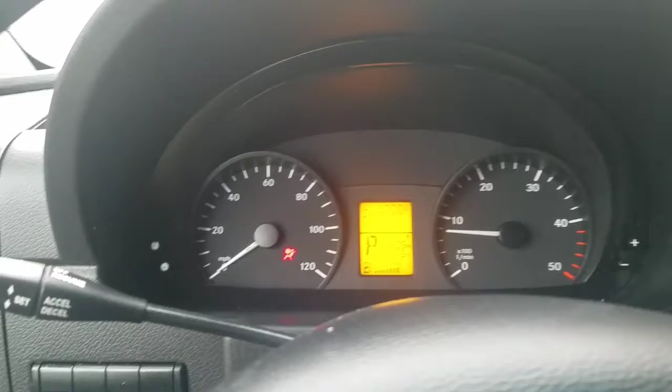Okay, we're working on the Sprinter. We're taking a look at the 2-hour inspection. Right now we're inside the car. Going to start it. First thing I notice is that it says the service is overdue by 1,700 miles.

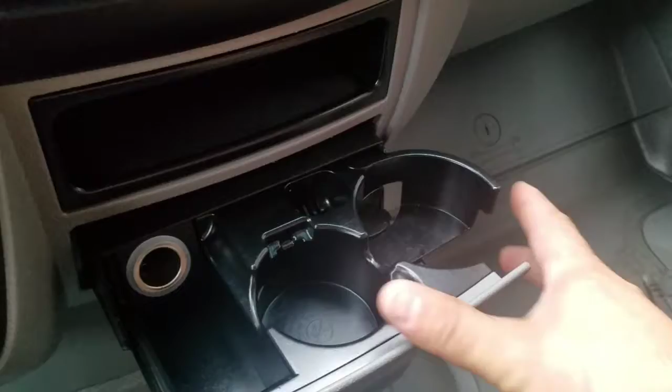There's a small cover missing for an extra button. It's just a cover, but it is missing. What else did we notice? There's a clip, the clipboard, supposed to hold papers. We put the clip here. That's broken. The cup holder is supposed to ratchet in and out to hold your cup. So if we decide to put our water here, it should tighten up and hold, but it doesn't. It'll just fall over. Alright, so I guess you could put it there.

Test the glove box. Glove box opens, closes, locks. Parking brake. Put it in drive. Parking brake is holding. In reverse, holds. Okay, we have another compartment here. That seems to be working. Dome light works. Both seat belts we tested, they're both functioning. They lock.

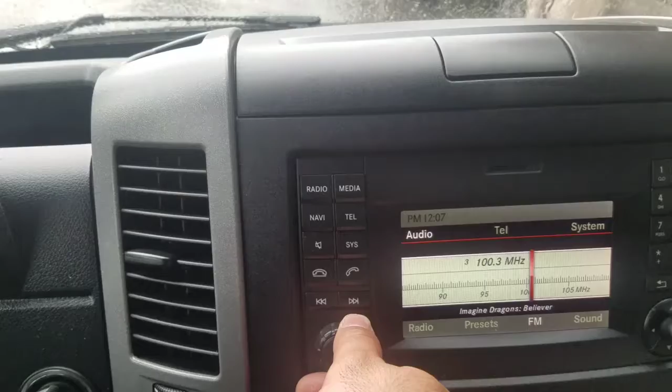Interior looks pretty clean. Yeah, pretty normal wear and tear. It has 31,000 miles, very low miles. Alright, the interior does look pretty clean. Radio is functioning. It doesn't sound like any of the speakers are broken or damaged.

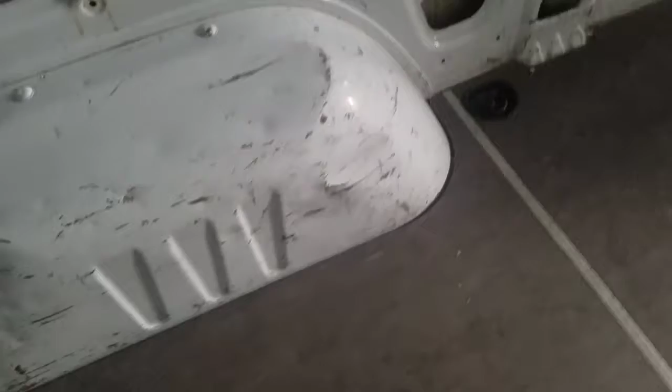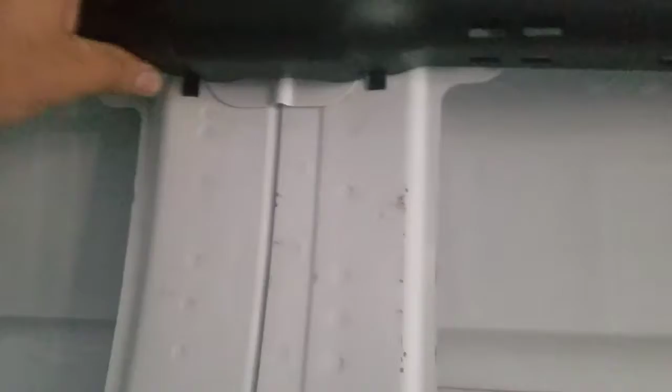We'll take a look in the back here. Floor looks pretty decent. The wheel wells are banged up a little bit on the left side. Some internal damage from it being used as a cargo van. Overall, it looks pretty good. There's a few missing covers for the electrical system, but not a big deal. Everything else seems to be connected over here.

Wiring's working fine there. Alright, I got a dome light that's... okay, so there's a little bit of an electrical problem here because I wiggle this and the light comes on and off. I guess the wire shorted somewhere. It came apart on the actual dome light itself. A little bit of damage on the internal panel for the door. I'm not sure if any of the damage protrudes the body to the outside. I'd have to look from the outside when we get back out.

We're gonna go on a quick road test and see how everything feels. Okay, we tested the AC. It is blowing pretty cold. Fan speeds are working. Recirculate, it's working.

Alright, so we're going on the road test. So far it feels pretty good. The wipers are wiping, no problem. There was a little bit of streaking in the beginning, but it seems okay now. The truck's a little bumpy, but it's probably because it's empty and it has the 2500 suspension in it, so with an empty van you're going to feel a little bit more bouncy.

I hear the turbo coming on. It sounds like that's working fine. It has power. You hear a little bit of noise in the rear of the car, but it sounds like it might be normal. It's probably because the van's empty and it's echoing.

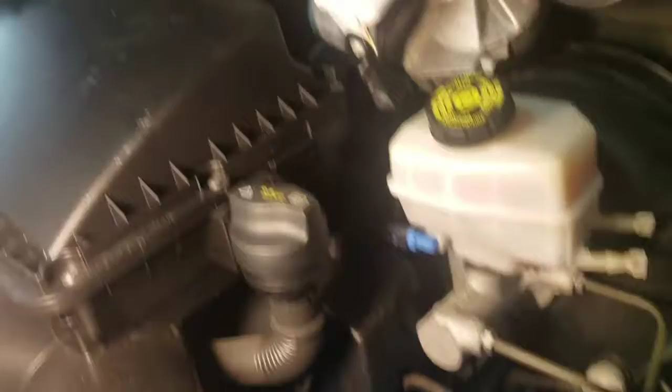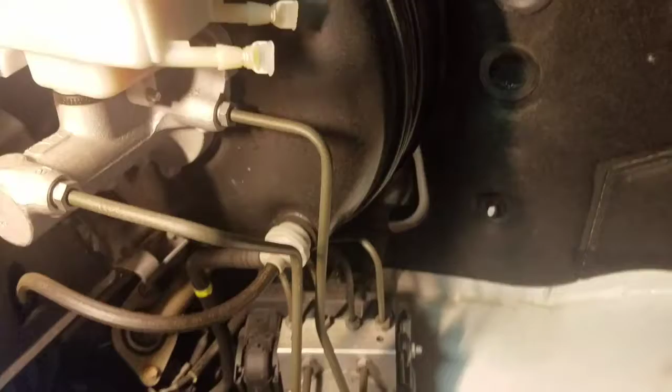So we have the hood open. It has the 4-cylinder in here. I do not see any signs of leaks. Washer tank is holding. Brake lines are okay. There's no indication of a front end crash on the support, at least here. Looks like it's pretty solid.

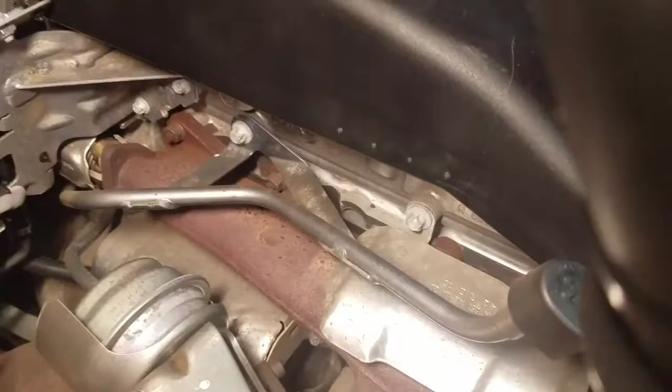Okay, this is the other side of the engine. The turbo looks okay. Everything looks very clean, which I would expect for a 30,000 mile car. Looks original, looks OEM. Diesel exhaust fluid.

The coolant kind of looks green, which usually means it's been replaced. Actually, no, when I look into it, it looks more blue, which is the OEM fluid. So that looks okay.

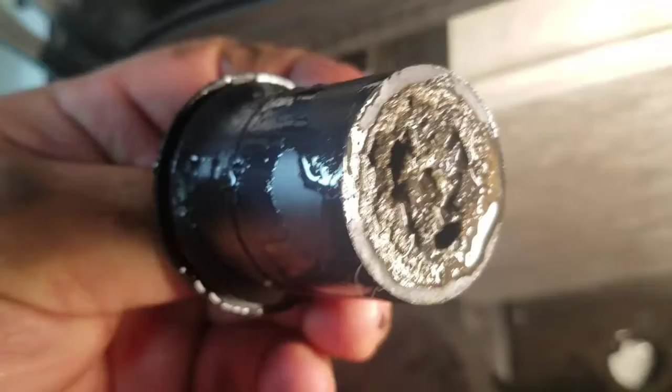I do notice that the reed valve, which is just a drain valve in the air filter housing, is clogged at the bottom. So what I'll do is try to clear the hole. It's better just to remove this completely. Alright, so I removed this valve. This valve gets clogged. I cleared it out. We'll clean it really fast to prevent water from going in here later, because rainwater can come in.

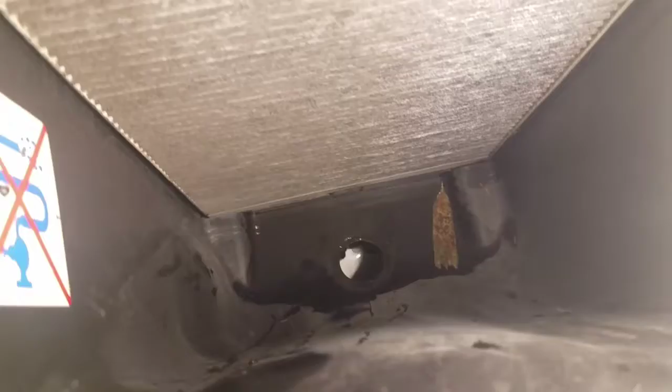It goes through this filter. I don't know if it's happened already, and then it can go into the glove box area and into the car. So here, Jose, just grab this, we're gonna clean that out in the sink. That's just a preventative thing, so whether you buy the car or not, at least the next person won't have that problem.

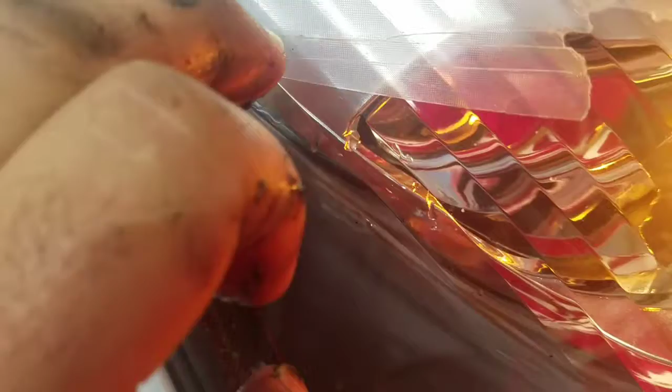Okay, the lights are all working. I do notice that there's some tape around the corner here of the light. I can't really make out whether it's cracked or not, but it does look like there might be a crack. It's very hard to tell because they have the tape over it. Yeah, I can't really tell. It feels like the tape is definitely cracking.

I think it might be covering something. I don't see why else they'd have tape over it, unless it was cracking or there was a crack in the lens. It's hard to tell without peeling that off, but the headlight may be cracked on that side. The grille looks good, looks brand new. There's again some tape on this side. You might want to ask them to peel that off before you buy it, and take some pictures to prove that it's not cracked on both sides.

It might just be some tape someone put there to protect it, but it's hard to tell whether it's cracked or not. The body looks like it's in really good shape. There's a couple little dimples over here, that's gonna happen from the inside. I could see a few more on the side here. You can see the reflection of it right there, it changes, and there's like a few dimples. That's gonna happen in a cargo van. There's another one down here, it's raised because people put things on the inside.

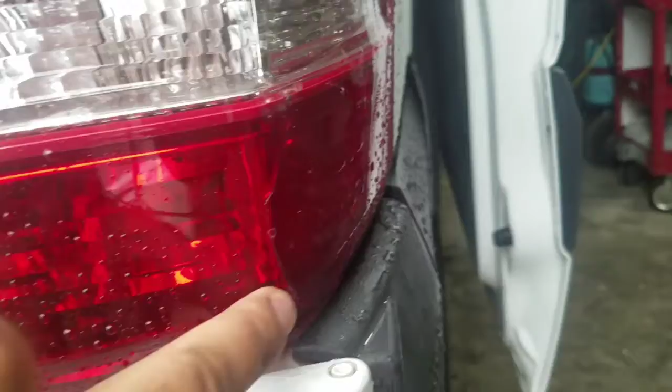Taillight has a crack right here, small crack. Water's probably going to start entering. There's another crack down here, and one more - oh, that one's actually not going through, but you do have one at the bottom here and one over here on the side. Water gets in here and it'll start corroding. It happened to our van.

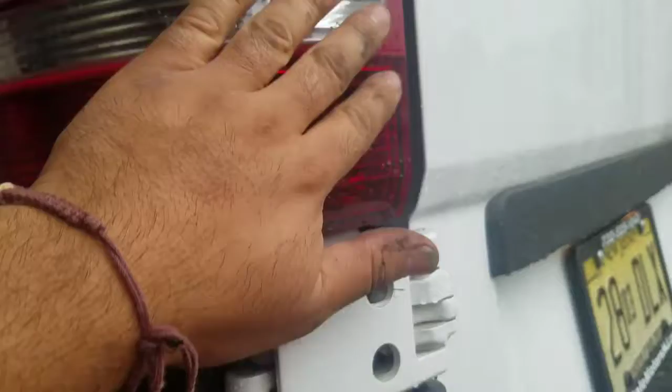This side, just a little scuff, but nothing cracked. On this side, doesn't feel like it. No, this side looks pretty good. Your marker lenses are okay. Marker lens okay over here. It's hard to tell, but the third brake light looks alright as well.

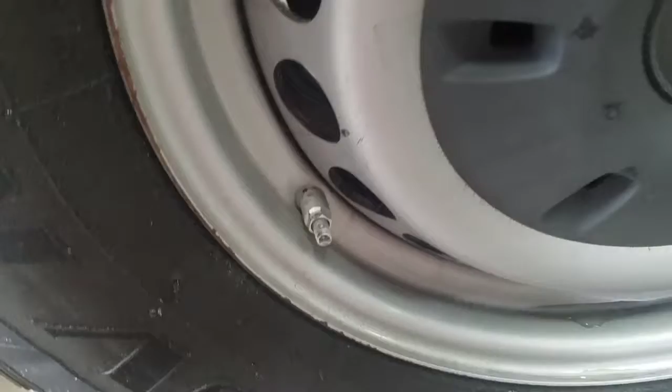Tires have ample tread. This is the left rear tire. Right rear tire is just the same. Right front tire, plenty of meat. Left rear tire, right rear tire the same. It has valve stems, metal, which probably means it has a tire pressure monitor system in it.

The sliding door opens very smooth, like glass. It's floating. We have some problems with our door on our van, so I noticed that that's in great shape there.

Doesn't really look like too many things were spilled on the interior. A couple of stains expected. And we're running the diagnostic test now, which is why the wire is connected to it.

And see, the door's opening. Door opens, no problem. Interior looks pretty good. Everything looks good under there.

Let's see if it has the toolkit. Can you grab a flat screwdriver? We'll open up the toolkit.

Window switches work, windows are going up and down. Alright, so the toolkit's in it. Yeah, toolkit's in there, lug wrench, bottle jack, all your parts are there.

Overall, as I said before, the van's in really good shape. A couple of things like the tail lights, headlights are questionable. I'm going to check the brakes and the undercarriage while one of the other guys is connecting the computer and checking to see what kind of codes we have.

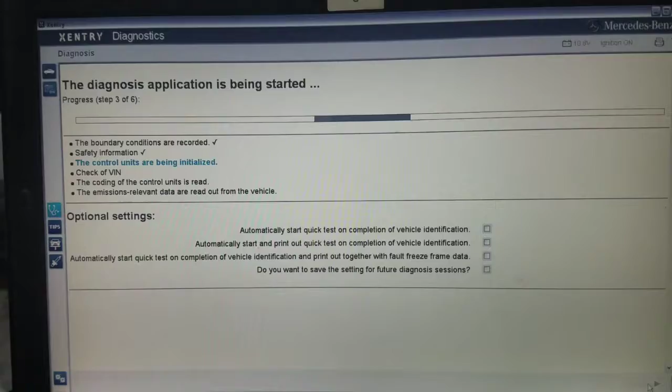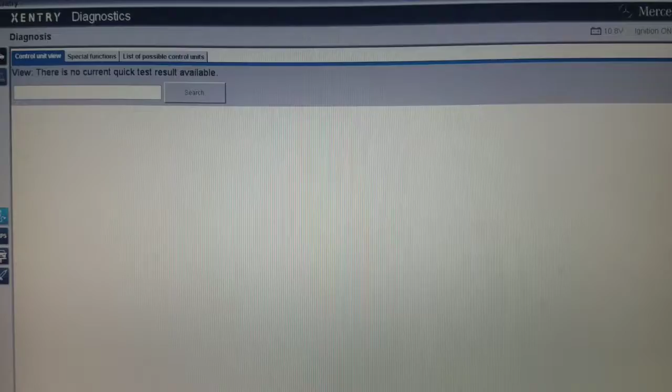Okay, now we're running the computer diagnostic portion of the test and the inspection, and the computer's going to do its thing. It's going to connect to all the control modules in the car, and it's going to tell us if there's any old codes, new codes, current codes, and once we have all that data, we'll show you all the information. So we're pretty much going to do a quick test.

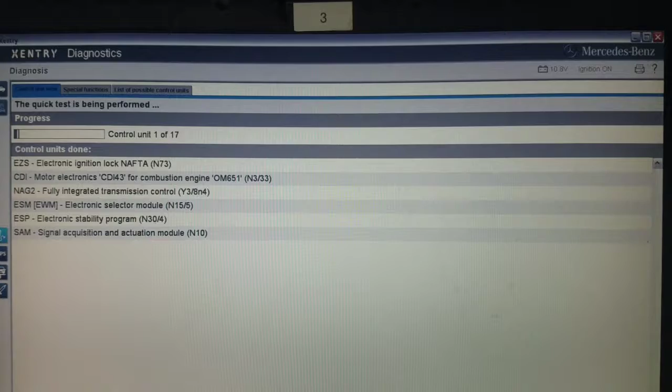And run the tests - steering lock system, engine module, transmission module. Still running the test.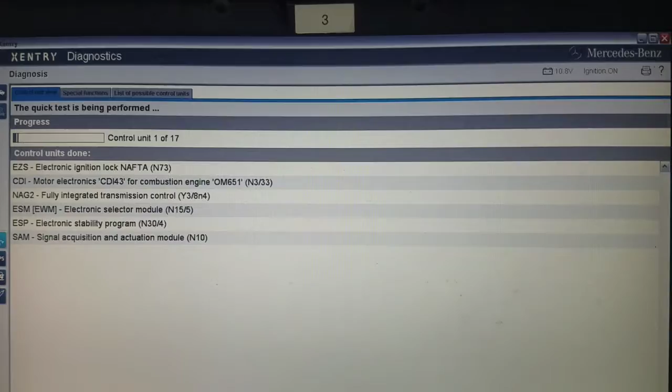Okay, so this is the rearward view. This is the transmission and drive shaft. Everything looks good. This is your diesel particulate filter and flex pipe coming down on the 651 engine, which is the 4-cylinder.

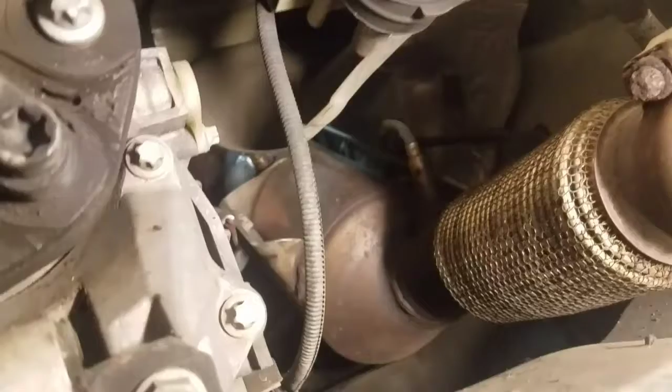Normally, whenever this happens, it usually will crack on a 642 on the flex pipe here, but this one I'm not sure if it's going to do the same thing, but it is not cracked. There are no problems with the diesel particulate filter or flex pipe at this time.

I also looked at the front of the engine area, underpan, the underpanel for the oil pan. Everything is dry, I do not see any leaks. There isn't any sign of oil. Transmission looks good, again no leaks. Mount feels solid - well, not solid, it feels like it has the right necessary play.

I thought there was a little bit of a fuel leak. Smelled a little fuel when I slid under, but I think what that is just some overspill going down the filler neck and dripping out the side. So it's a false alarm.

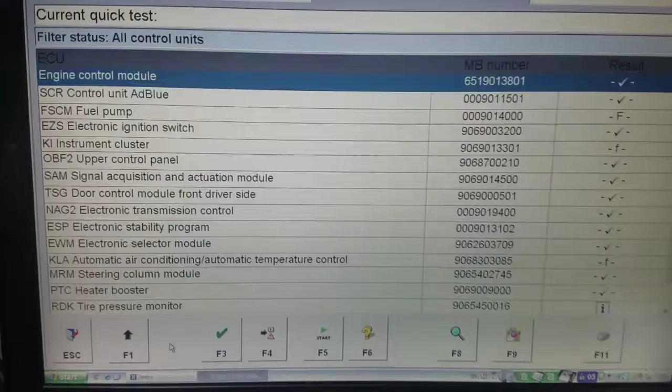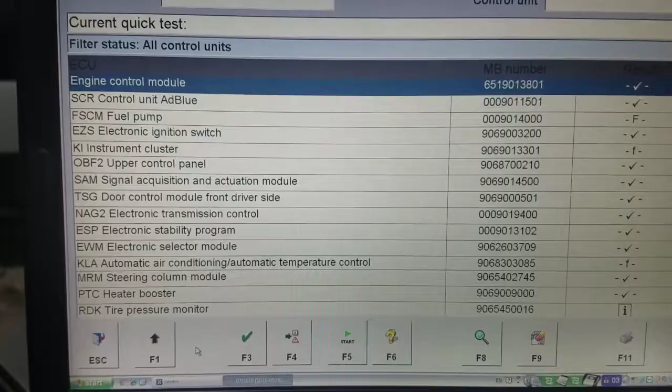Okay, for some strange reason I had an internal, odd fault - it said unknown fault type in the engine control module. And whenever I click on the engine control module to enter it, it gives us a glitch, and it tells us that there's an error, it cannot communicate. No matter what I do, it tells me to check these things. So it is possible it could be an engine control unit, it could be a power supply, or engine CAN bus problem - CAN bus is usually the network, communication data lines.

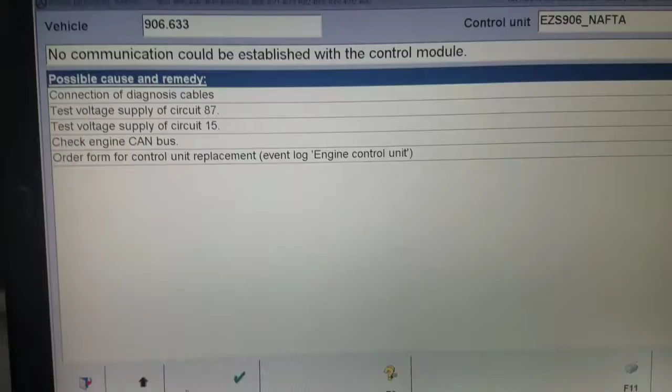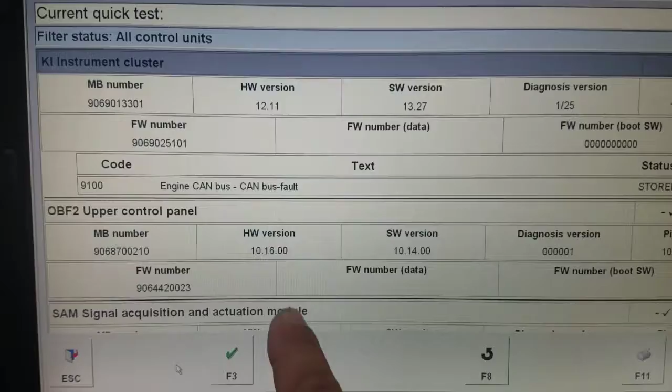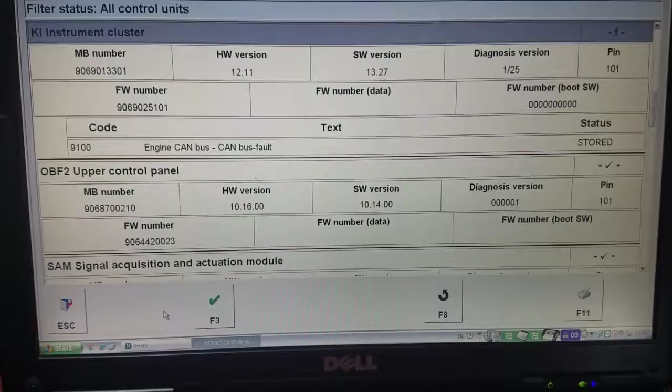So that's possible because we did see another code in the instrument cluster, saying that the engine bus has a CAN bus fault. So it's possible there could be a CAN problem with the car. It is driving fine, there isn't a check engine light, there isn't any issues with that. There may be nothing, but I have to at least disclose that I'm having an issue getting into the module. It could also be a glitch in our software, but unfortunately there's no other way to check that.

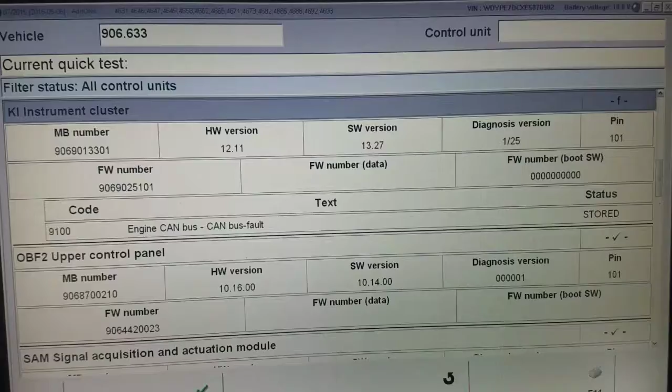If you decide to purchase it, I would definitely put a clause in there telling them that you might have to go to the dealer to have them check just to see if the engine module is okay with another software version, something newer. And if it doesn't come up as a problem, then you're good.

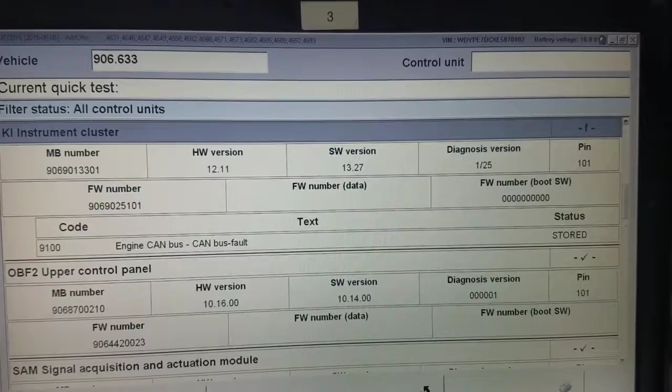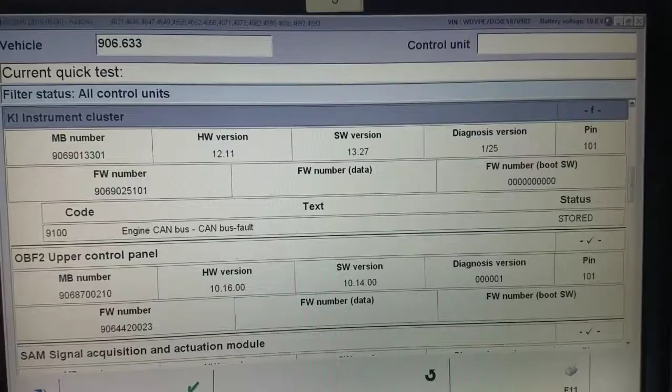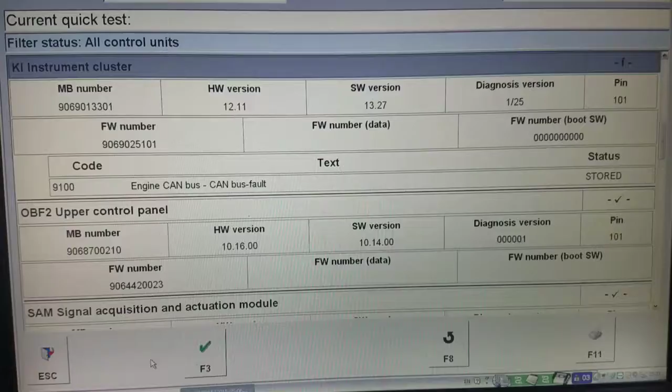If it does come up as a problem, then it'd have to be fixed. It's odd because the unknown fault type is a general code, and it will let me erase the code because it was stored, but for some reason I cannot get in. I was able to get in under the wrong engine, but it tells me there's a problem. In other words, I'm in the wrong control module, so it should be automatically picking this information up. It's noteworthy prior to purchase at minimum.

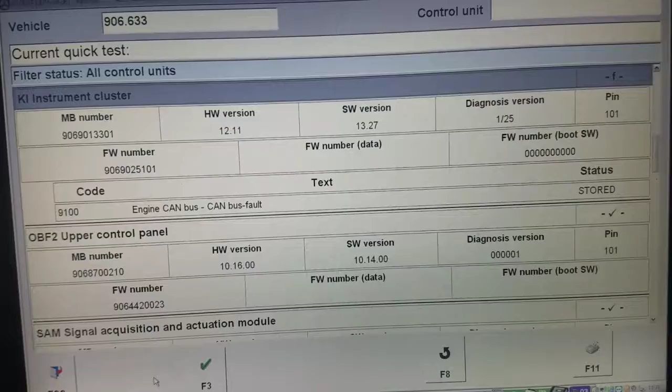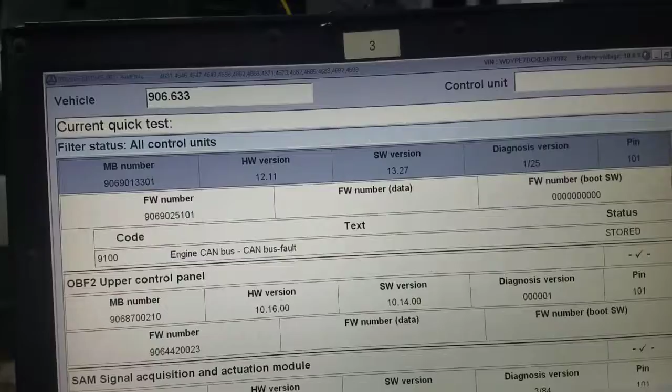So this concludes the electrical inspection of the vehicle. We did mention that there was a fuel code. Fuel pressure circuit is low.

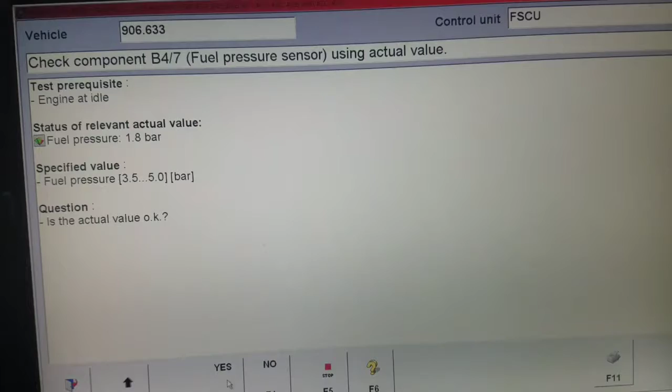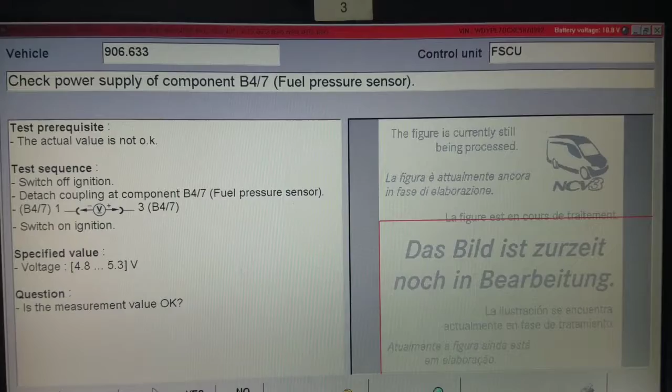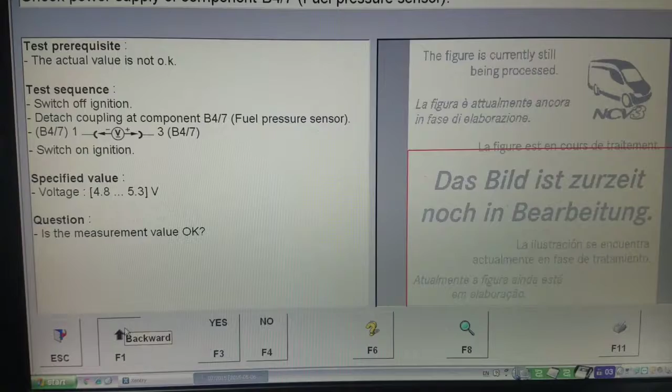So it does say that's fine. It's telling me to check the power supply of the fuel pressure sensor, which is working. It may be a problem with the fuel control module, but there's a few other tests that need to be completed to diagnose, go through the tree, and figure out if they're problems or not. It may be a problem with the wiring as well. So these are the two noteworthy things I noticed electrically going on with the vehicle.

The car doesn't look like it was in any accidents, doesn't look like any foul play. It could just be a computer glitch.

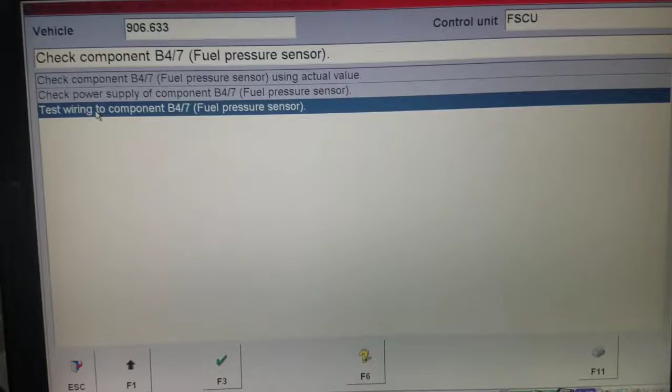We can discuss it further over the phone. So that completes this inspection, and we're going to gather this YouTube video together and send it over to the client.

Alright guys, so we're finishing up on this 2014 Sprinter 2500 van. The customer came to us because they wanted to do an inspection, a pre-purchase inspection. They're buying this vehicle, they're out of town, and they hired us to check it out. So we are doing a 2-hour inspection. This is the conclusion of it.

The computer diagnostic test is running behind me. We've already done the road test, we've already done a visual inspection of the underbody, the physical body. We've looked at the tires, the brakes, everything that's possibly something that we would check before you buy a car.

Overall, my assessment of the vehicle is it is in very good shape. It only has about 32,000 miles, so I would expect that. It's a 4-cylinder, clean, no oil leaks. The suspension feels tight, tires are brand new, brakes look pretty good. The doors open smoothly. There's a couple of minor dings and dents from the inside protruding out, but I would say that's good.

It's got the newer style radio. Overall the van looks like it's in really good shape. If I were purchasing this van and this was what I needed, I would probably go ahead and go forward with it as long as the price was right.